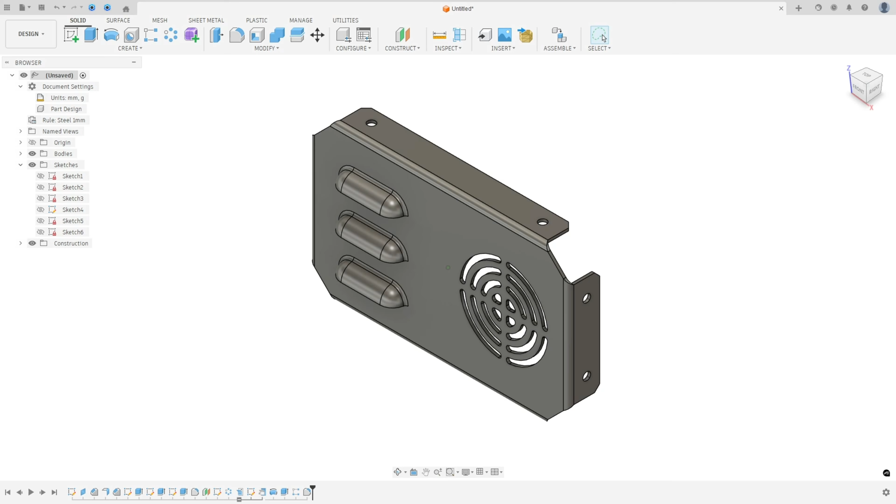Let's create one more tutorial in Autodesk Fusion. In this video, you learn to make this sheet metal ventilation cover. So open Fusion and let's go.

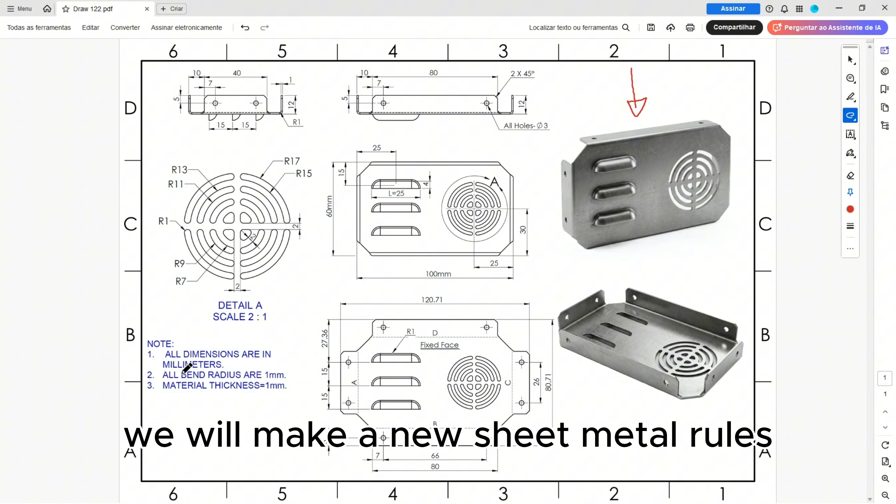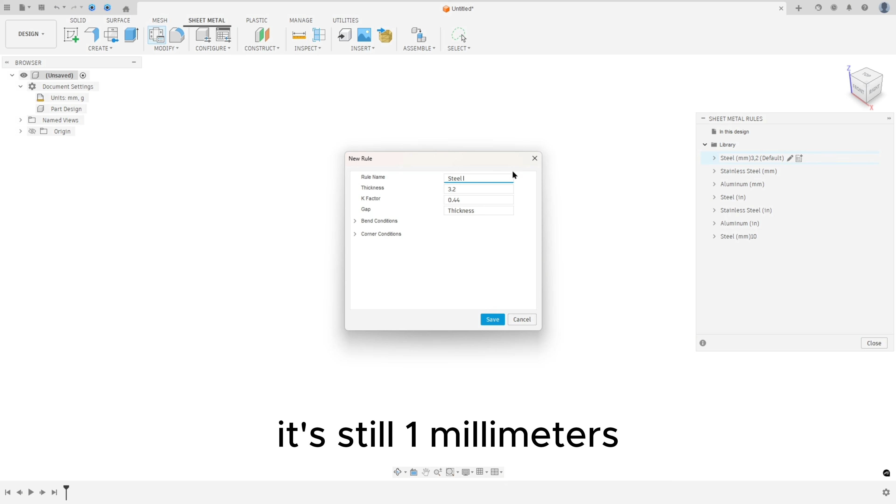The first step to create this part, we will make a new sheet metal rule, with all bend radius 1 millimeters and material thickness 1 millimeters. So open Fusion, go to sheet metal, select sheet metal rules, select new rule, name it steel 1 millimeters, thickness 1, show the bend conditions, bend radius 1 millimeters, and save this.

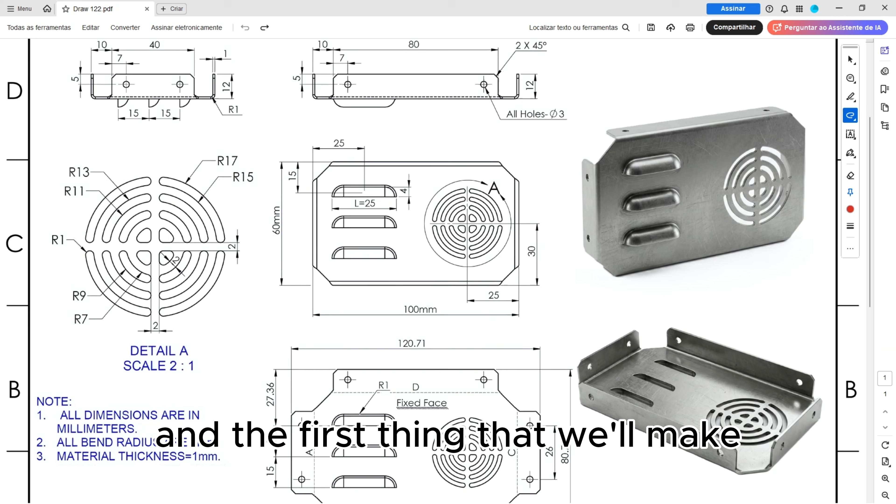We have this new material here. The first thing we'll make is the base, a rectangle 60 millimeters by 100 millimeters.

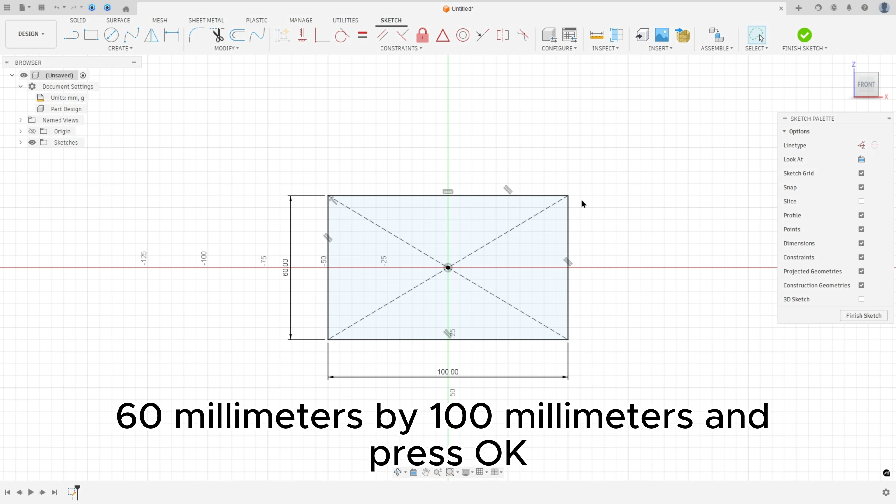Go to create a sketch and select the front plane. Select the 2-point rectangle, center rectangle, click in the midpoint, 60 millimeters by 100 millimeters and press OK. Finish the sketch, go to Flange, select this profile, and the sheet metal rule, select steel 1 millimeters, press OK.

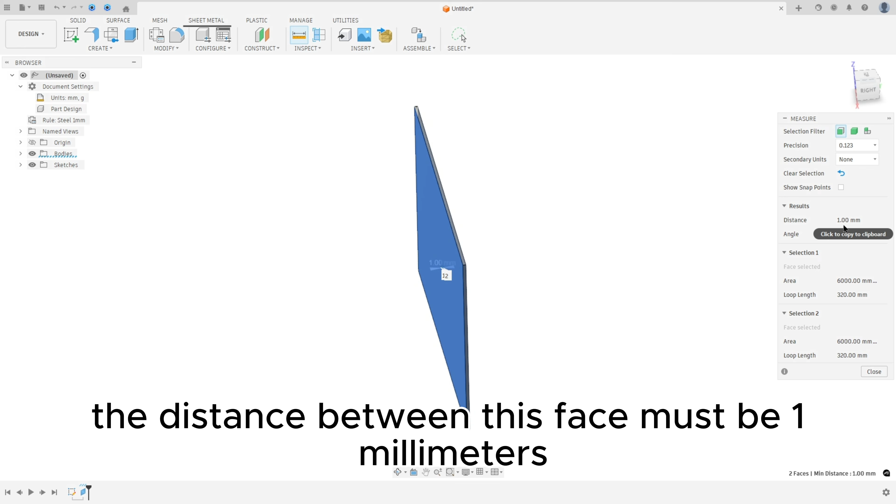Go to measure, select this face and this face. The distance between these faces must be 1 millimeters, the thickness of this material.

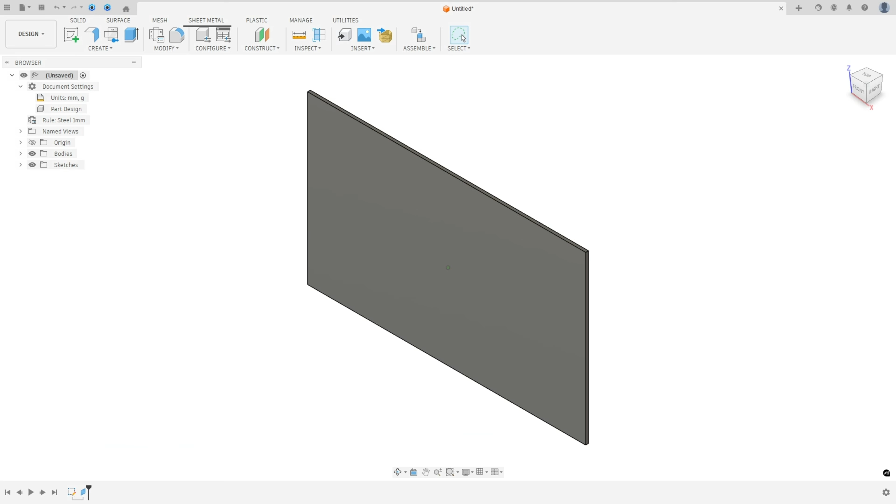Now we will create a chamfer here, 10 by 10 millimeters. Go to modify, select the chamfer, select this edge here and this edge here. The distance here is 10 millimeters, the type equal distance, and press OK.

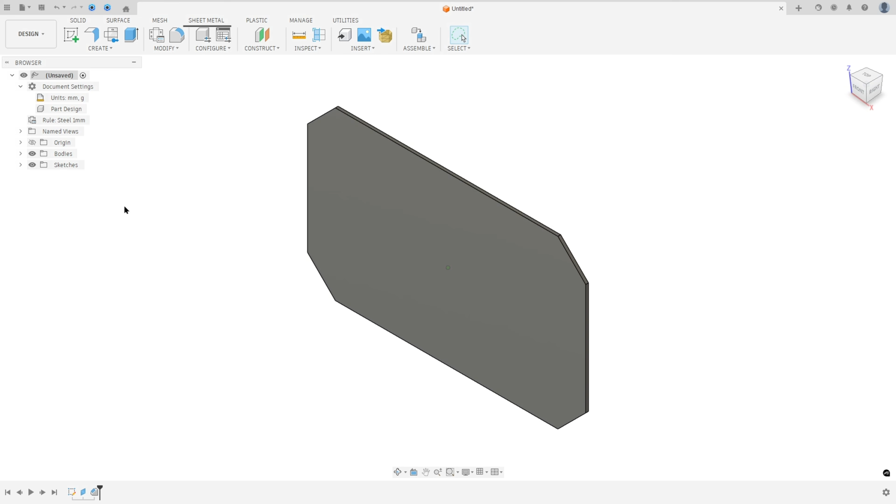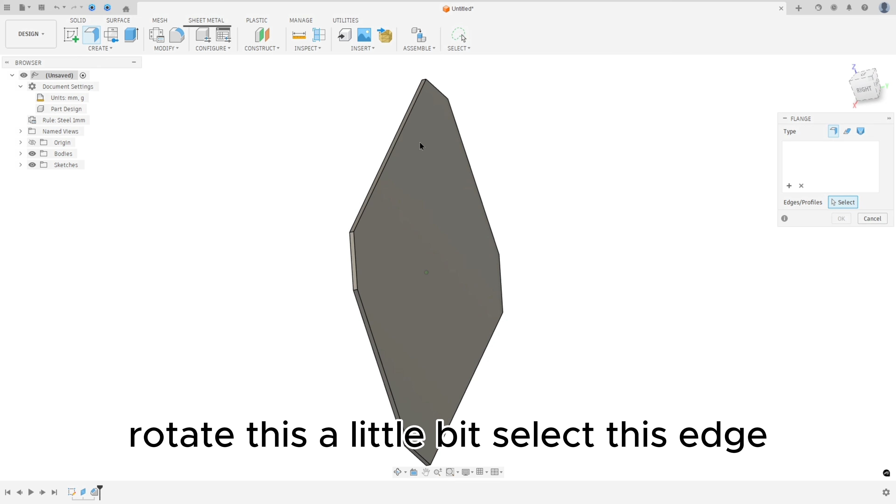Now we will create this flange. The distance of this face and the base is 12 millimeters, so we'll create all 4 flanges with 12 millimeters. Go to flange, rotate this a little bit, select this edge, this edge, and this edge. Move this, the distance here is 12 millimeters, the bend position inside, and press OK.

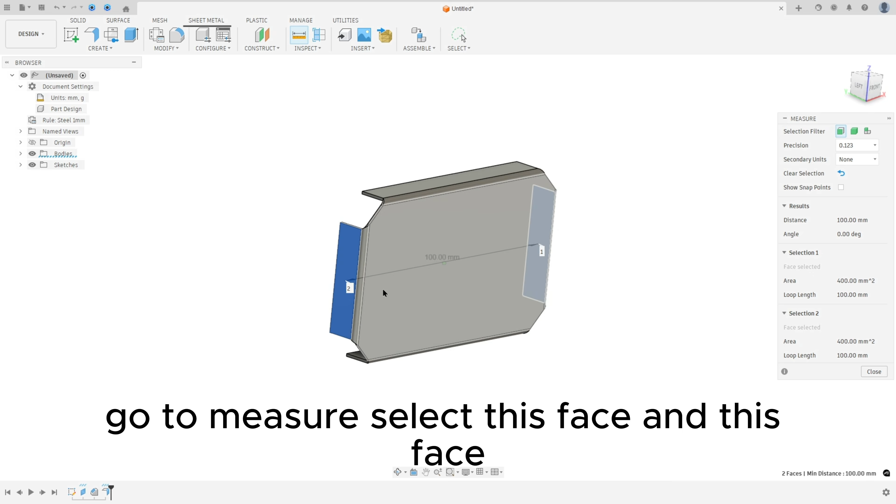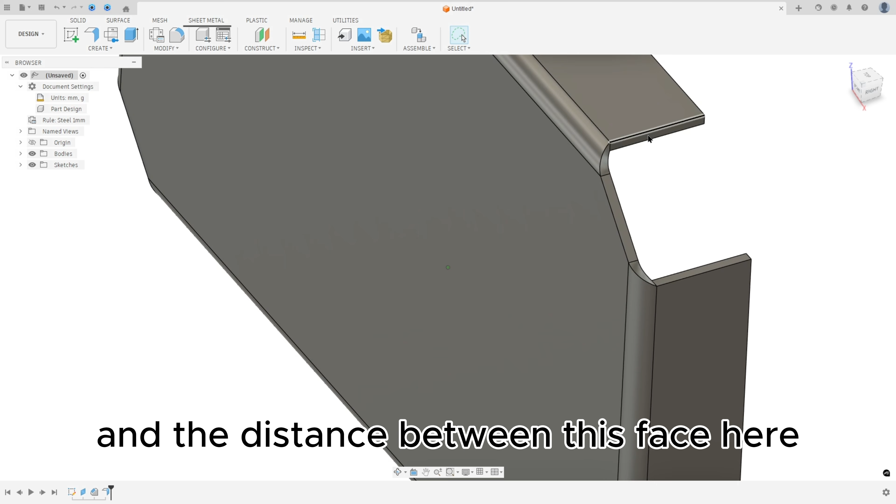Go to measure, select this face and this face. The distance here must be 100 millimeters and the distance here 60 millimeters. The distance between this face and this face here is 12 millimeters, and the distance between this face here and this face must be 10 millimeters. We just check the dimensions.

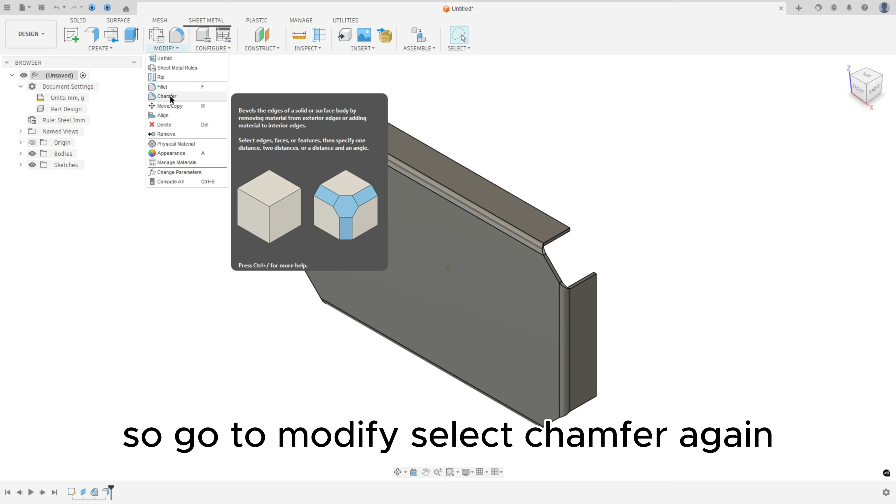Now we will create the chamfer here in this edge. The chamfer is 2 millimeters, equal distance. Go to modify, select the chamfer again, select this edge. The type equal distance, and the distance here is 2 millimeters, and press OK.

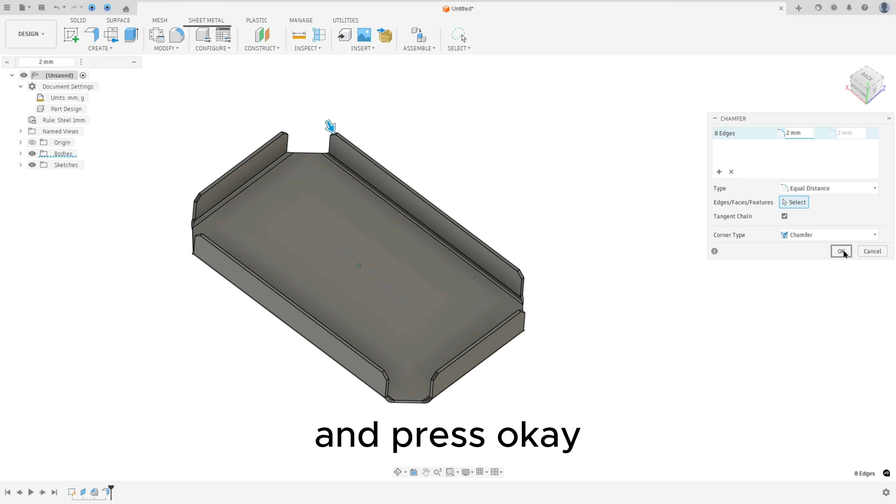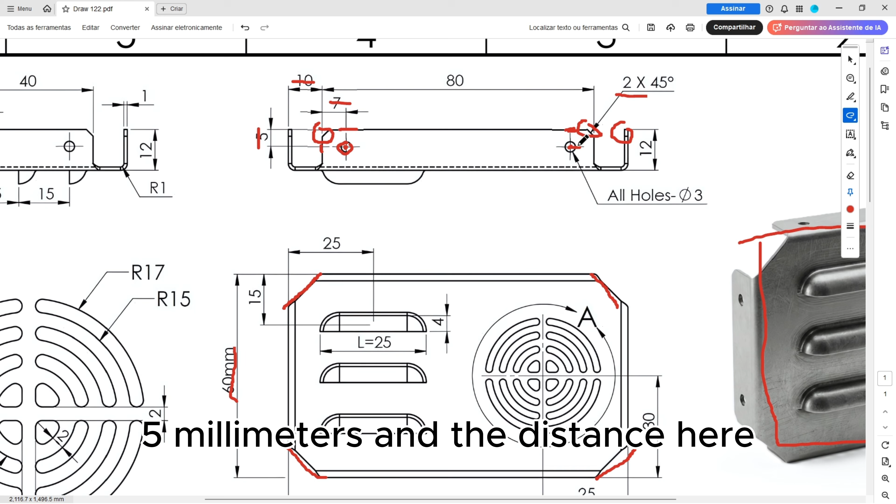Now we will create this hole. All the holes here are 3 millimeters diameter. Let's create this hole. The distance between this hole and this face is 5 millimeters, and the distance between this hole and this face is 7 millimeters. It is symmetric, so in this case the distance here is 5 millimeters and the distance here is 7 millimeters.

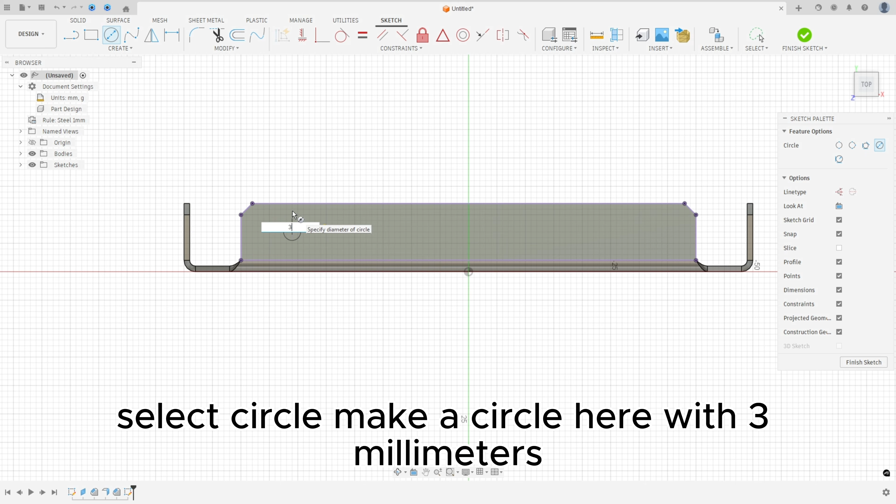Go to create a sketch, select this face, go to create, select project, select this face here and press OK. Select a circle, make a circle here with 3 millimeters, and create another circle here. Go to constraints, horizontal, vertical, select this point and this point here. Select equal, select this circle and this one. Go to sketch dimension.

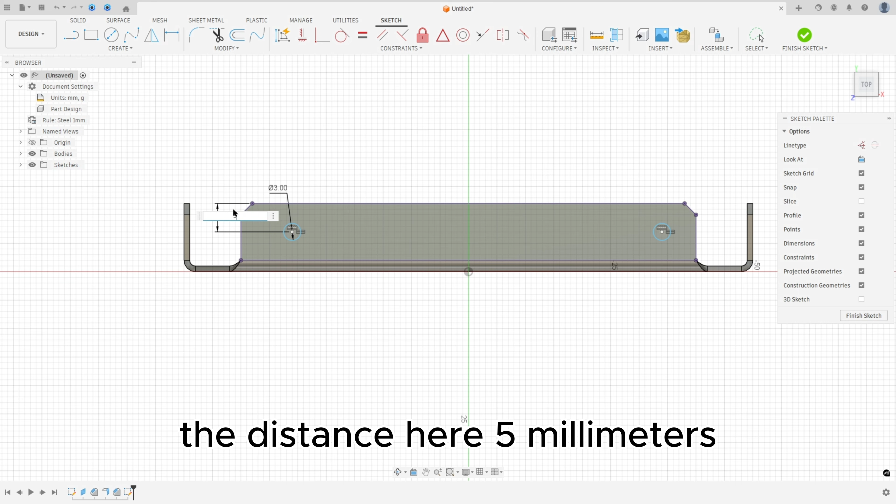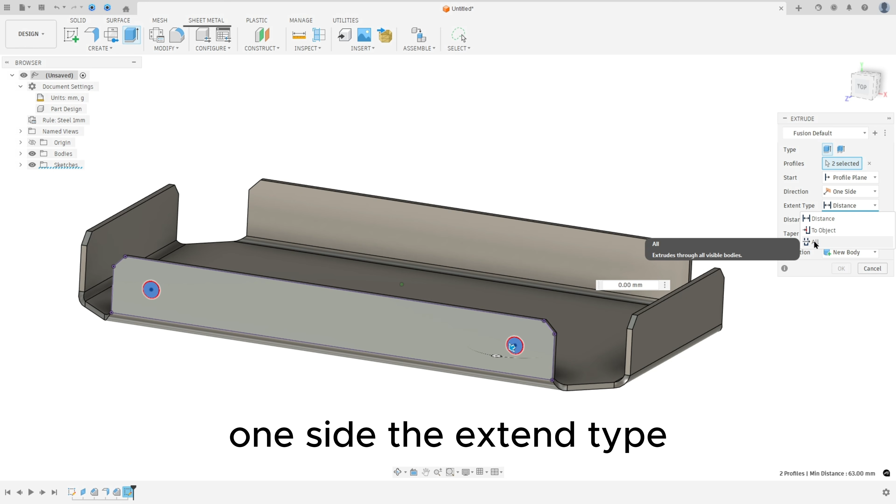The distance here, 5 millimeters, and the distance here, 7 millimeters. Select this circle and this line here, the distance here, 7 millimeters. Finish the sketch and go to extrude. Select these two circles, the direction one side, the extent type select all, flip the direction, operation is cut, press OK.

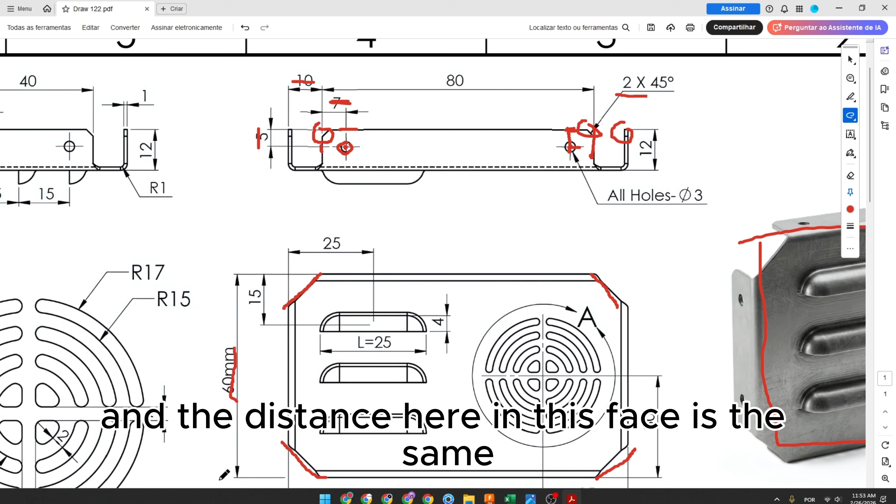Now we'll make the same on this face. Go to create a sketch, select this face here. I will rotate this a little bit. The distance here on this face is the same, 7 by 5 millimeters, and the circles have 3 millimeters diameter. Go to create, select the project, select this face here and press OK.

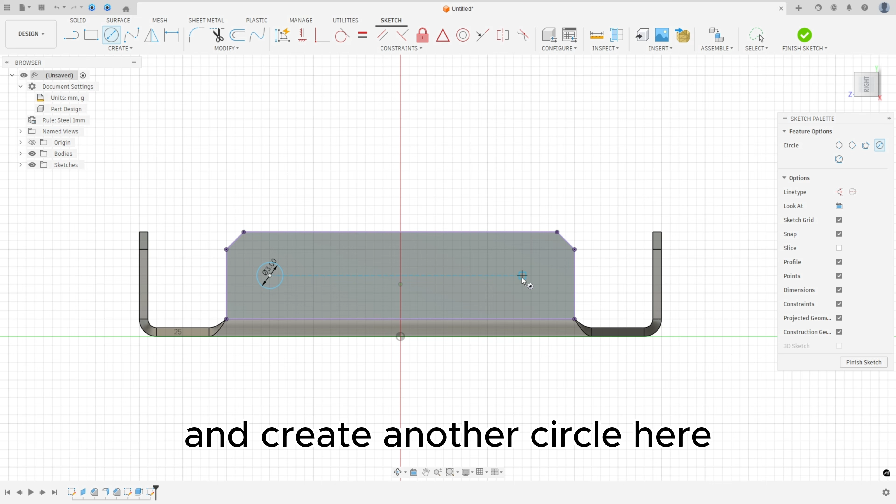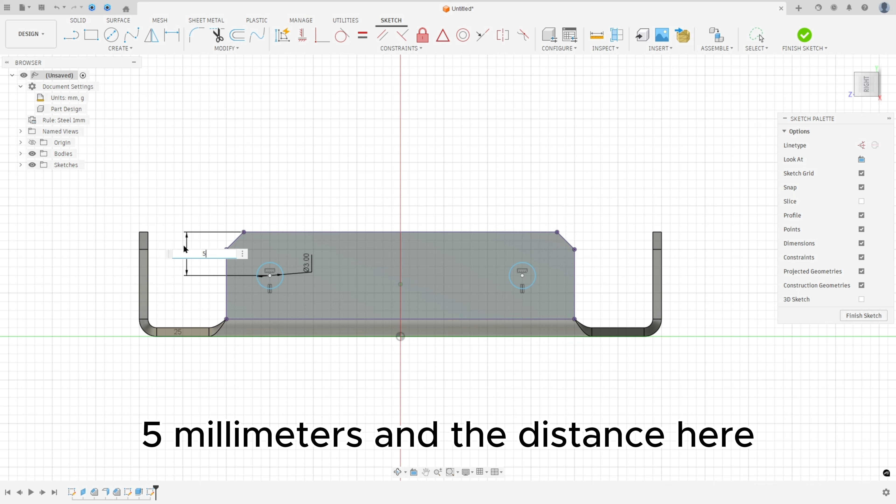Select a circle, make a circle here with 3 millimeters, and create another circle here. Go to constraint, select equal, select this circle and this one. Select horizontal, vertical, select this point and this point here. Now go to dimension. The distance here, 5 millimeters, and the distance here, 7 millimeters. The distance between this circle and this line here, 7 millimeters.

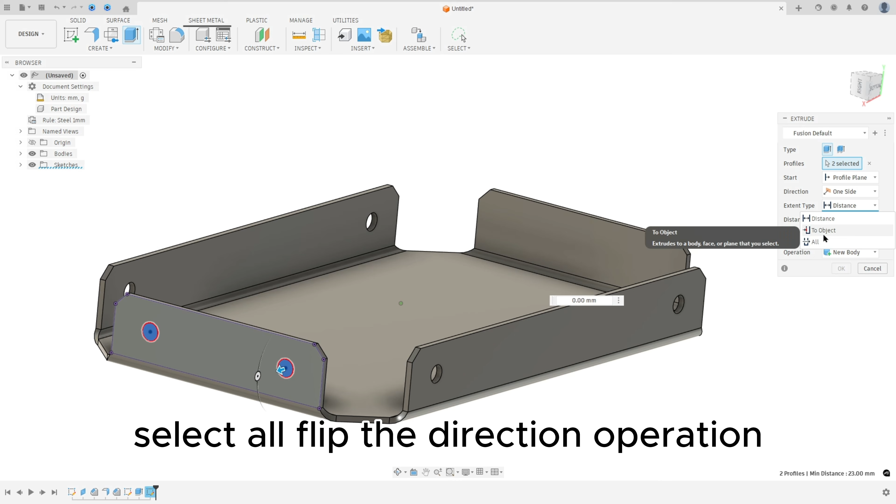Finish the sketch, go to extrude, select these two circles, and the direction one side, the extent type select all, flip the direction, operation cut, press OK. We made this.

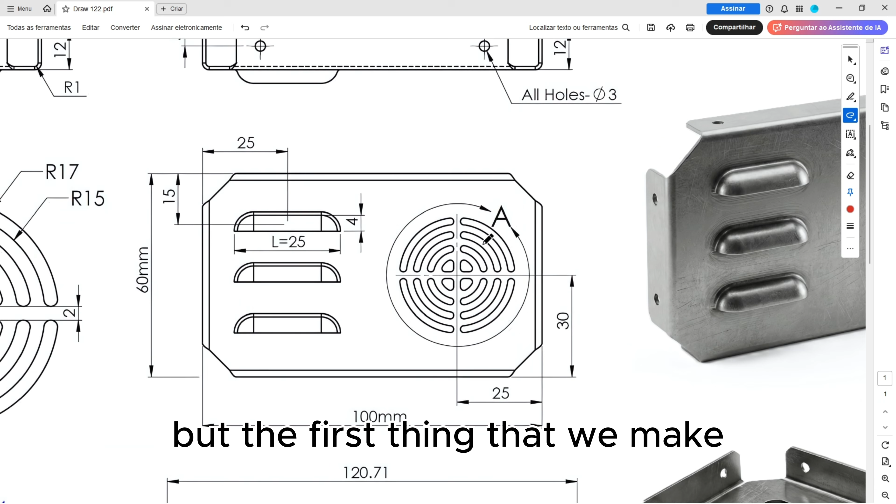And now we will create this vent here. We have the sketch here, but the first thing we make is this point here, the center point, and put this reference dimension, it will be the reference. The distance between this point and this edge is 30 millimeters, and the distance between this point and this edge here is 25 millimeters. So go to create a sketch, select this face, and go to create, select a point.

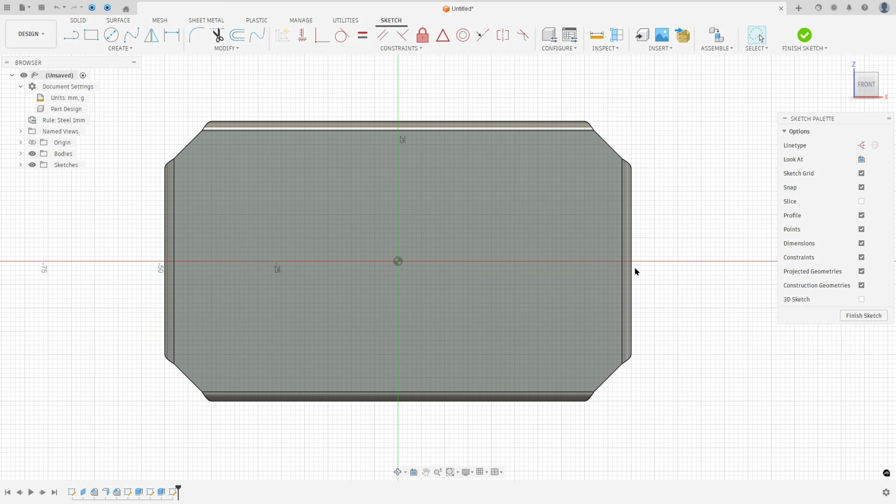Make a point here, and go to sketch dimension. The distance here, 25 millimeters, and the distance between this point and this edge here, 30 millimeters. It is in the center here, okay?

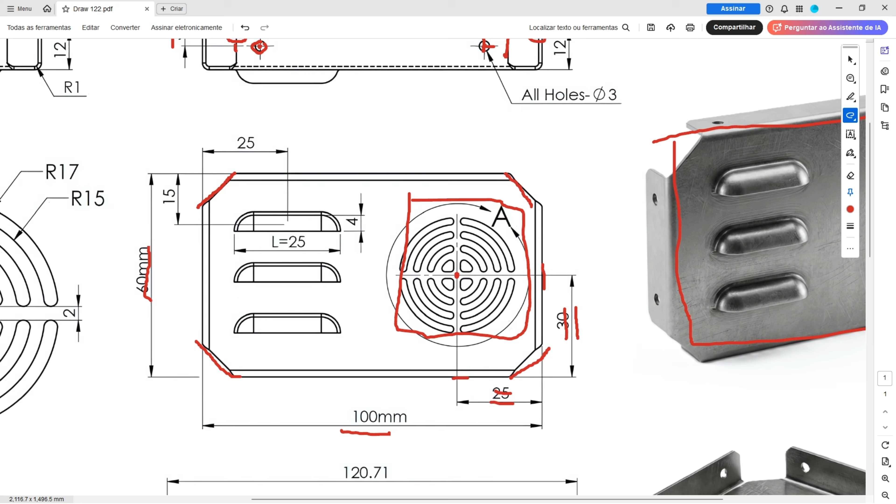And now we will create two lines. Here is the center point. So we will create this line here. The distance between this line and this point is 1 millimeter. And we will create this line here, tangent with this cut, okay? The distance between this line and this point is 1 millimeter.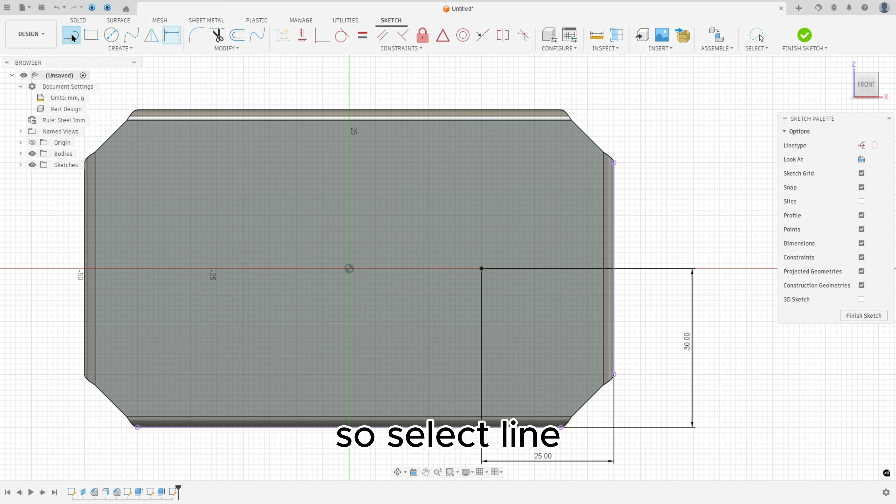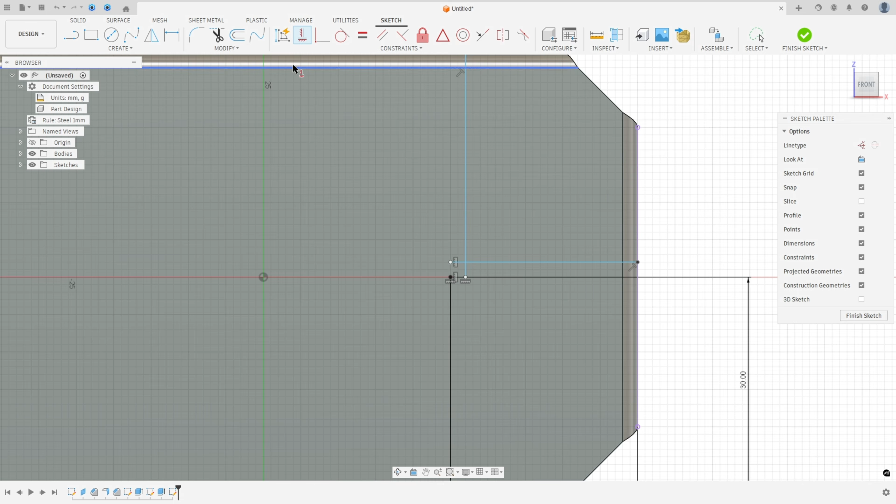So select line, make a line here. It is not a construction line, okay? And make another line here. Go to constraint, select horizontal, vertical, select this point and this point, select this point and this point here. Go to sketch dimension, the distance here, 1 millimeter, and the distance here, 1 millimeter, okay?

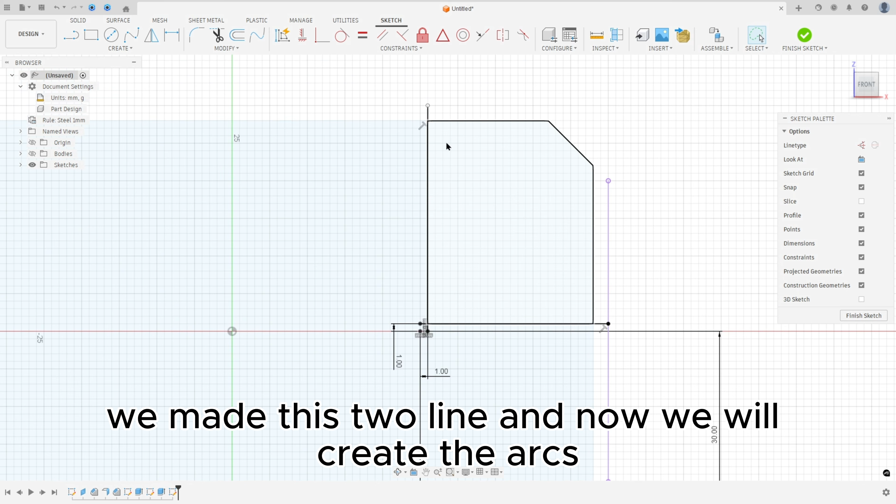I will hide this body a little bit. Let me move this dimension. We made these two lines. And now we will create the arcs, okay?

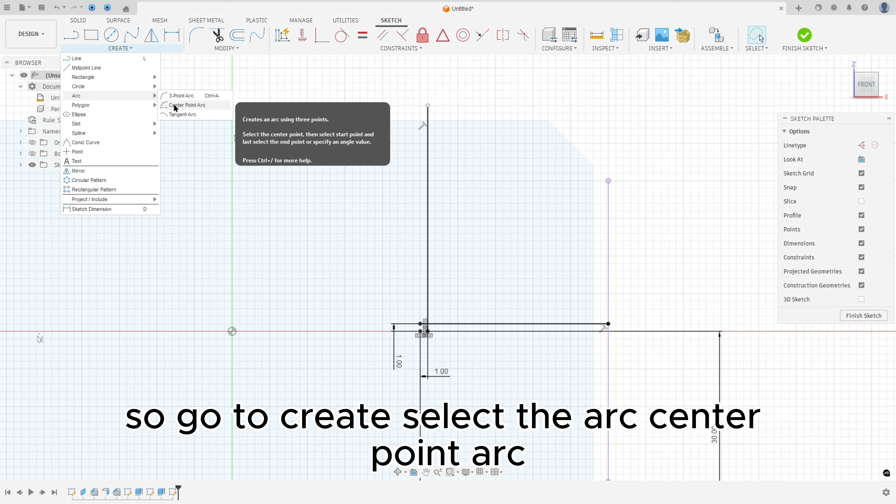The first arc that we make here is 17 millimeters of radius and 15 millimeters of radius. And this arc will be coincident with this line, okay? So go to create, select the arc, center point arc, click here in the center point. And the radius here, 17 millimeters, click here in this line and click in this line, sorry, 17 millimeters.

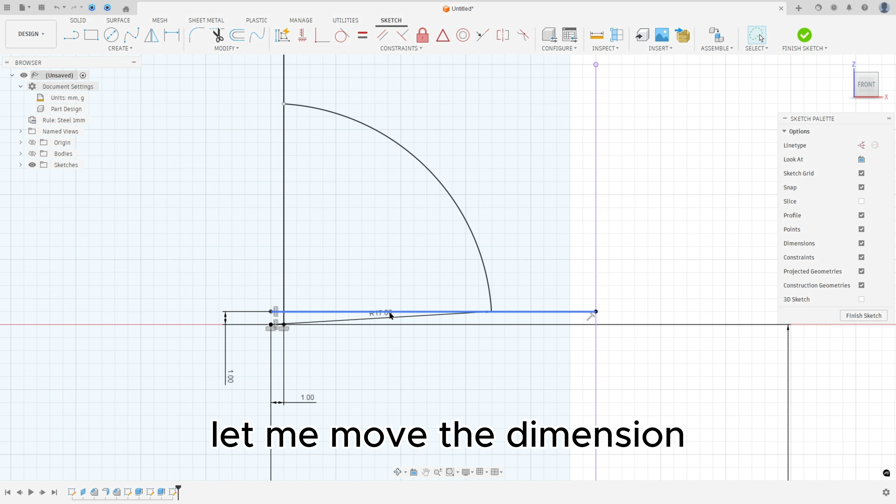Make an arc here. Let me move the dimension and create another arc with 15 millimeters.

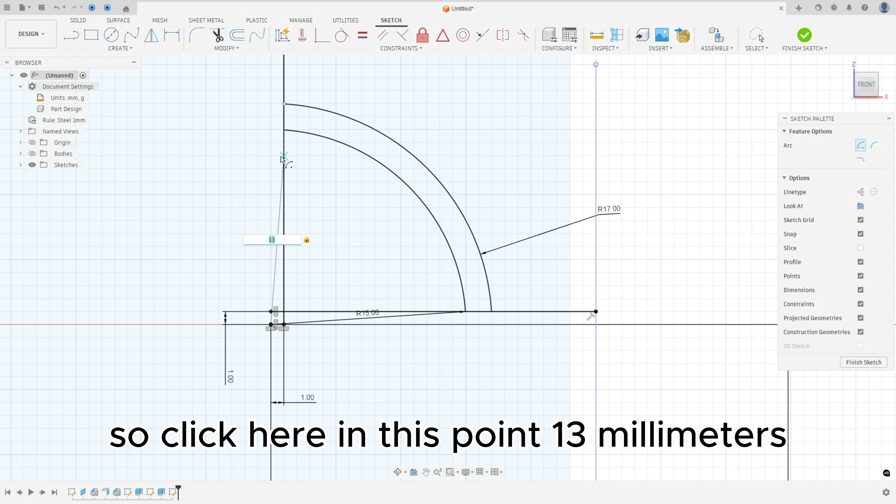Now we will create another two with 13 and 11 millimeters of radius. So click here in this point, 13 millimeters, and 11 millimeters. I will move the dimensions here so it's better for you to see the dimensions, okay?

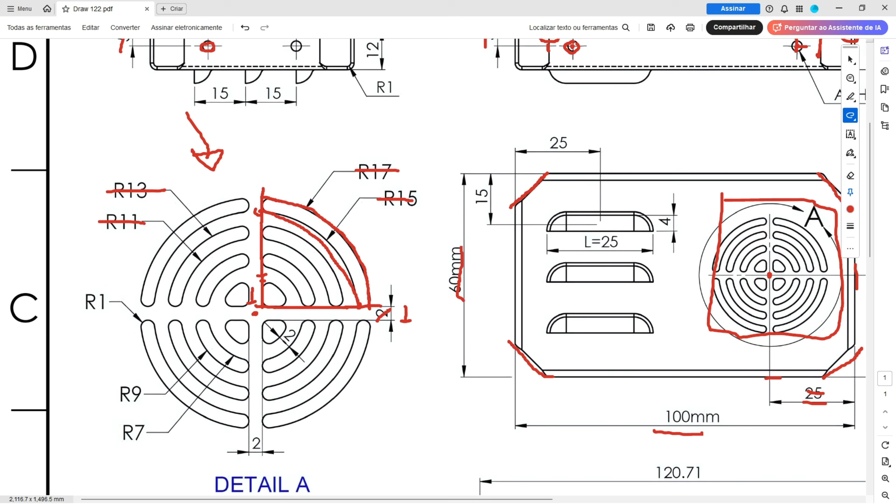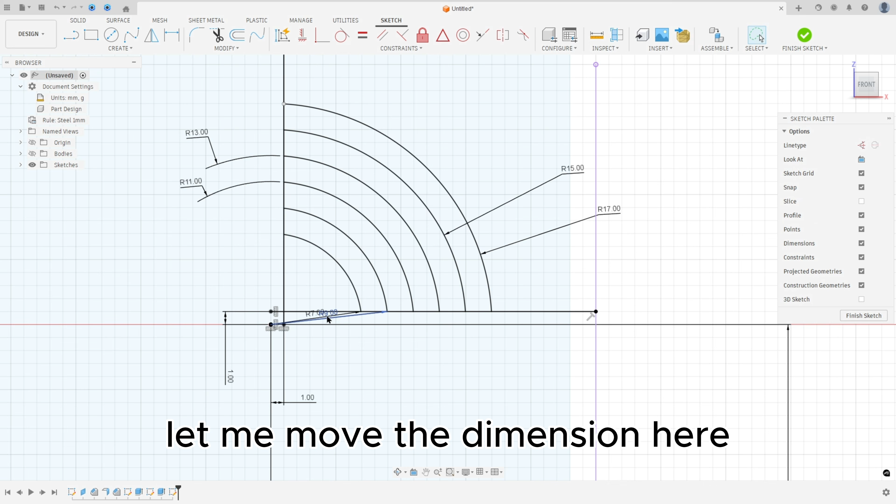Now we will create two more arcs with 9 and 7 millimeters of radius. Let me move the dimension here. And we're missing one. This arc here, the distance between this arc and this one is 2 millimeters.

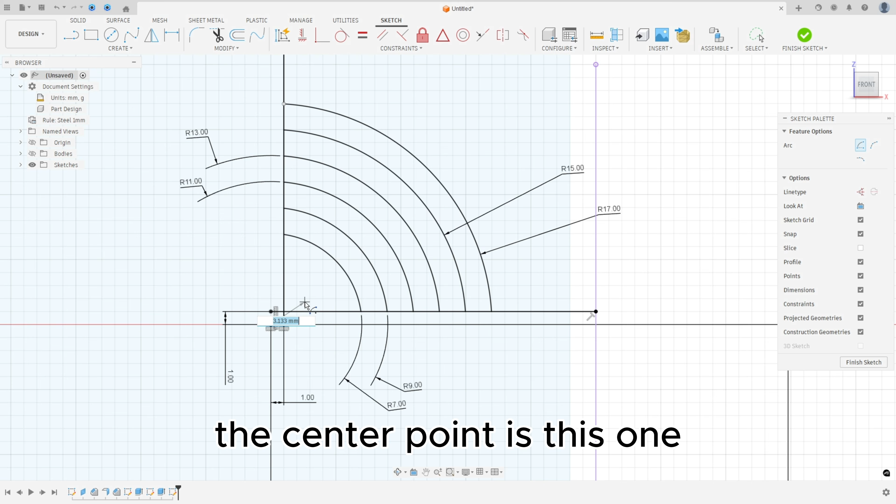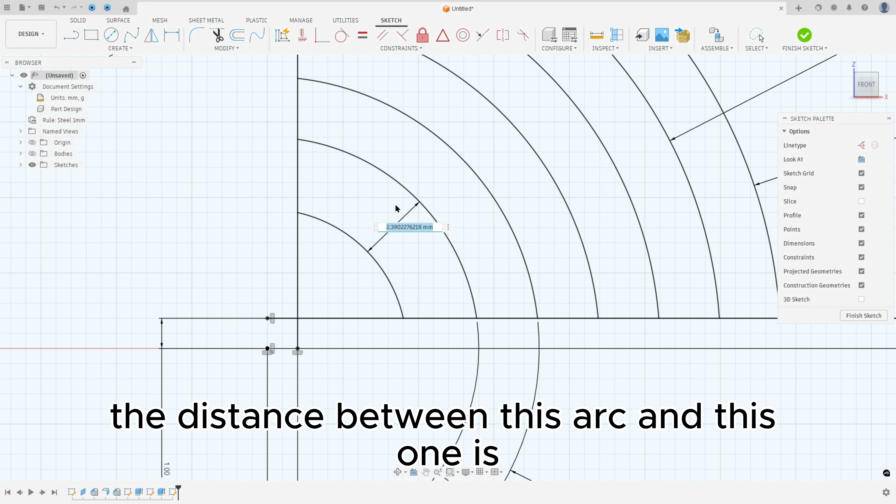So create a new arc here, center point arc. The center point is this one. Make an arc here. Go to sketch dimension. The distance between this arc and this one is 2 millimeters.

So we made this profile. And now let me see if this line is coincident. It must be coincident with this line here, okay? And now finish the sketch.

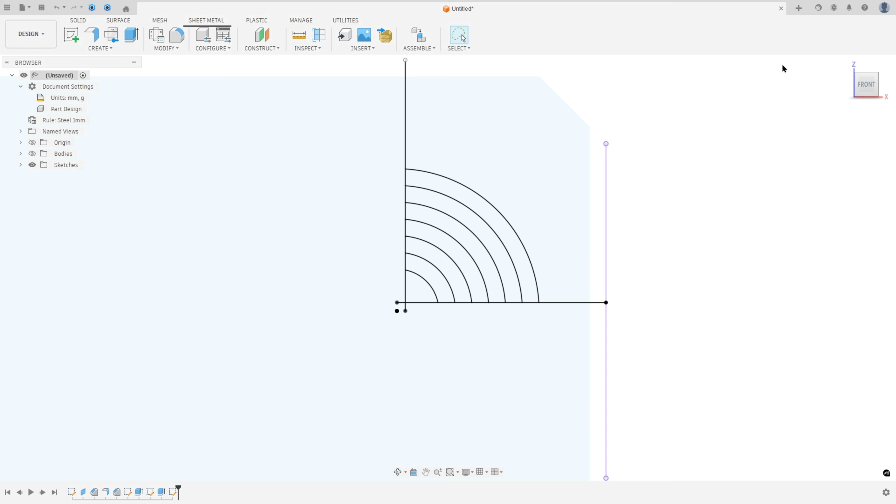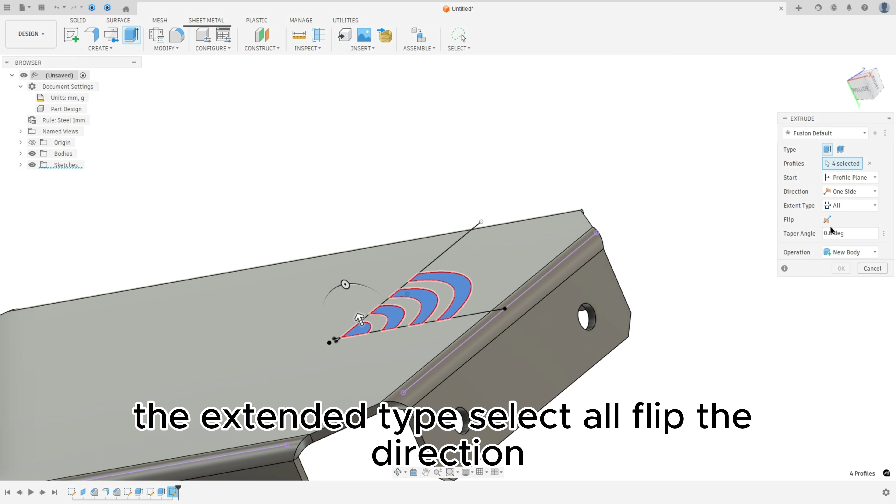We will make a cut here, show the body here. And now go to extrude, select this profile here and this one. The extent type, select all. Flip the direction. The operation here is cut, and press OK. We made this cut here.

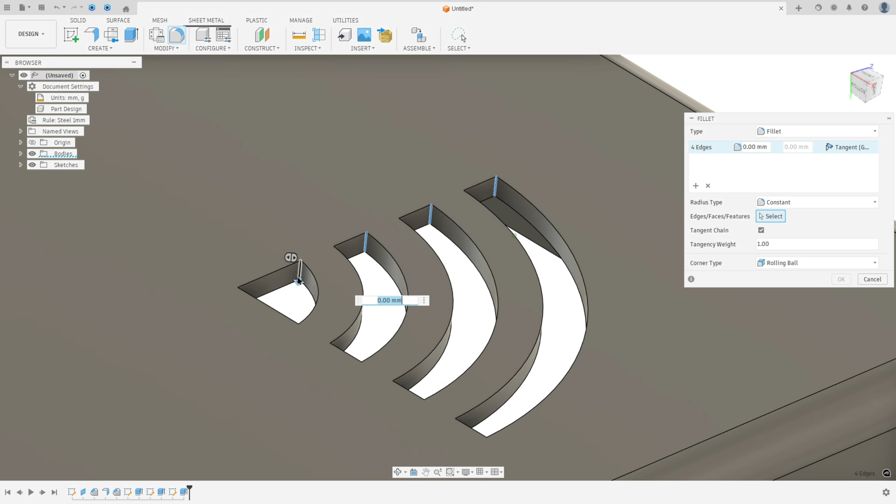And here the fillet is 1 millimeter. So go to fillet and select the inside edge here. The radius here is 1 millimeter. And press OK.

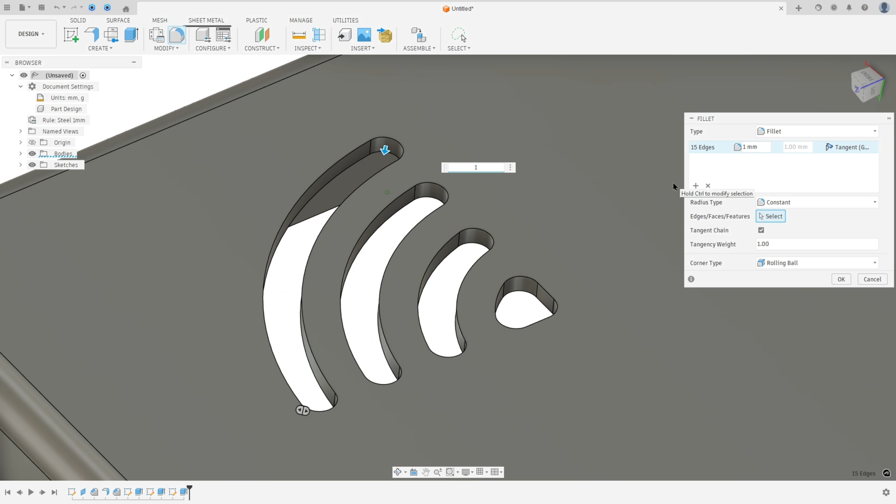We made this, okay? Now we use the circular pattern to create the other 3 cuts here. But first we need to make a reference. So show sketch 4. We need this point here to make a reference, okay?

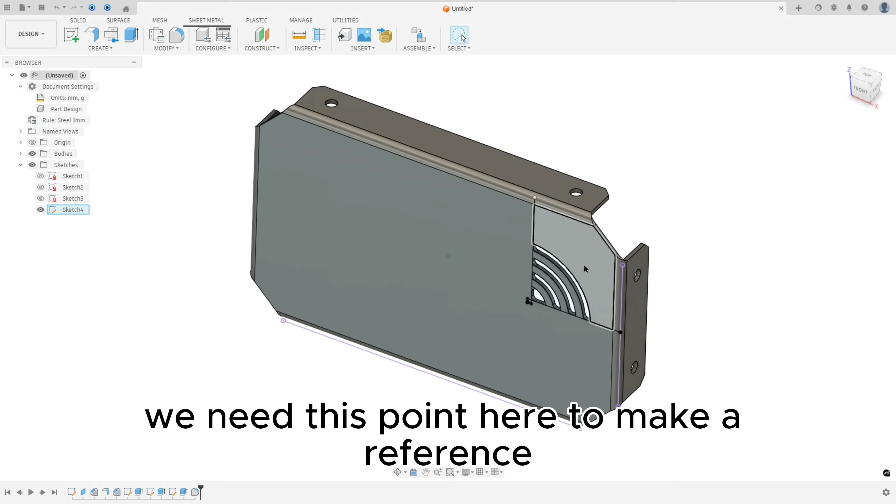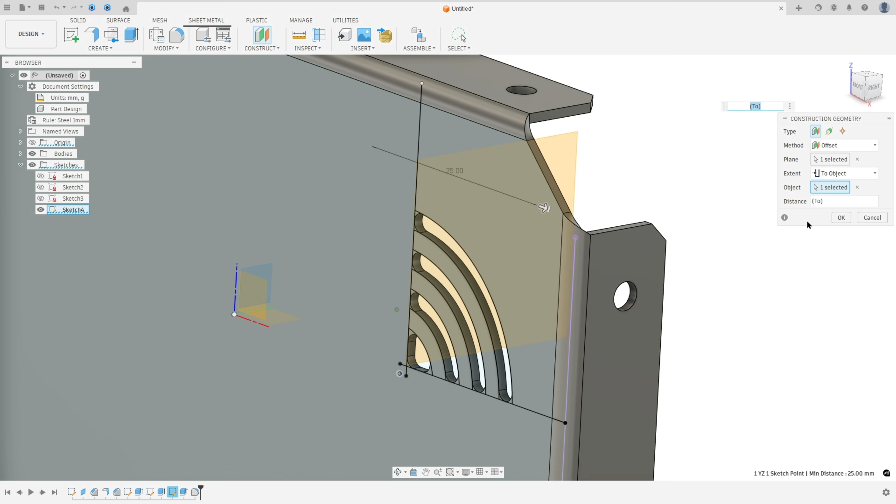So go to construct, select offset plane. And the plane that we'll select is the right plane. And the extent here, select to object. And the object, select this point here, the center of the arc, okay? And go to create a sketch, select this new plane here. And here, select a line, click here in the midpoint and make a line here with 10 millimeters.

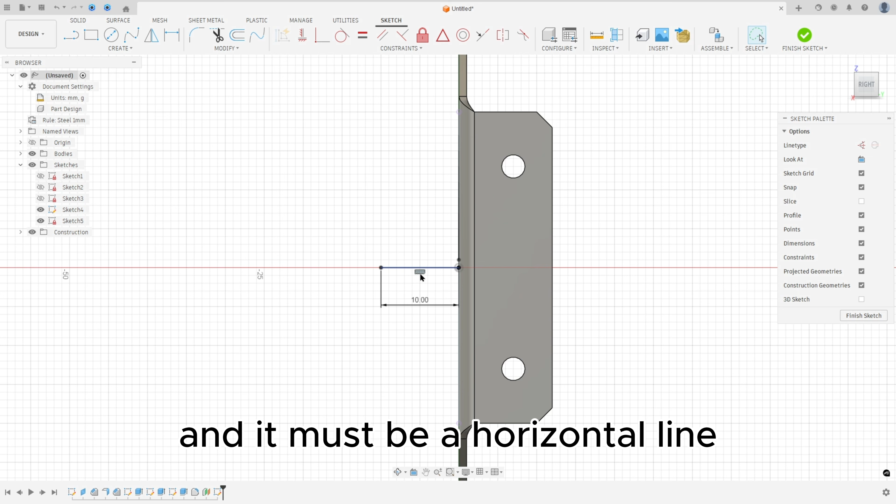Okay, finish the sketch. Make sure that this line is in the center point and it must be a horizontal line or perpendicular to this face, and press OK. Finish the sketch.

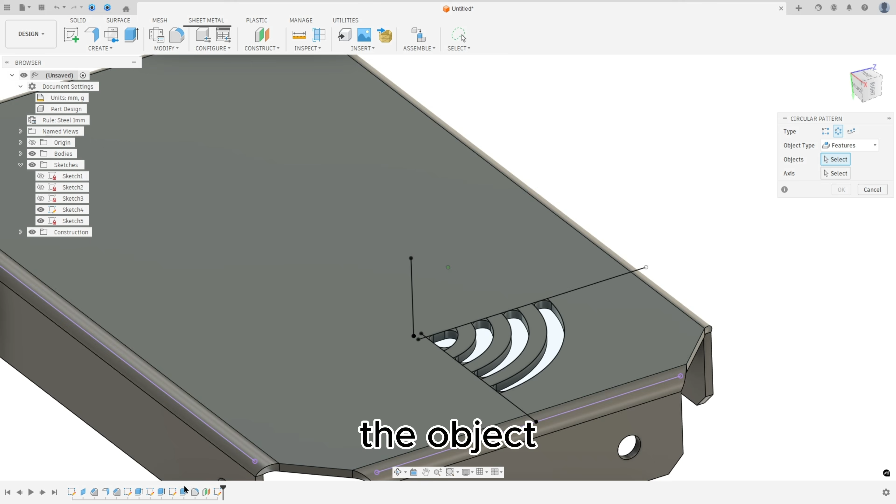Now go to create and select the pattern, circular pattern. The object type, select features. The object, select the extrude and the fillets. And the axis, select this line here. The quantity here is 4 and press OK.

Hide the sketch 4 and the sketch 5. We made this, okay.

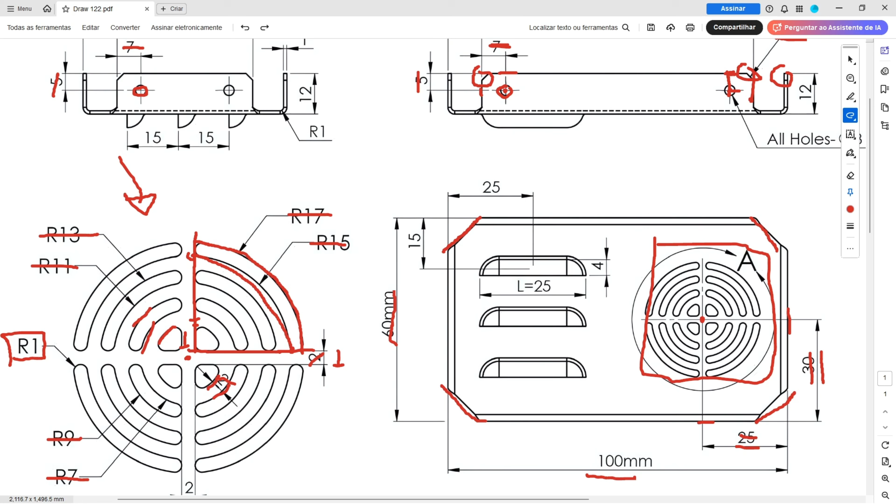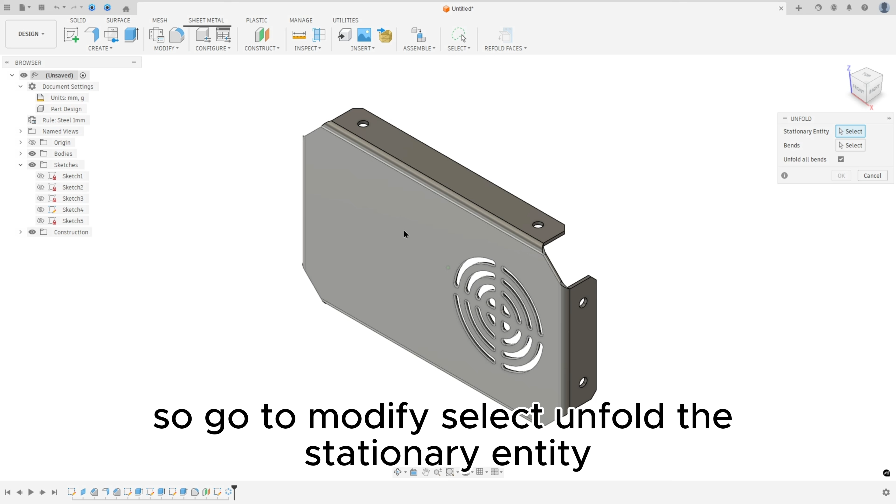And now we'll make these louvers here. But first, we will need to unfold this part to take a reference here. We need this dimension, okay? So go to modify, select unfold, the stationary entity, select this face, and select unfold all bends and press OK.

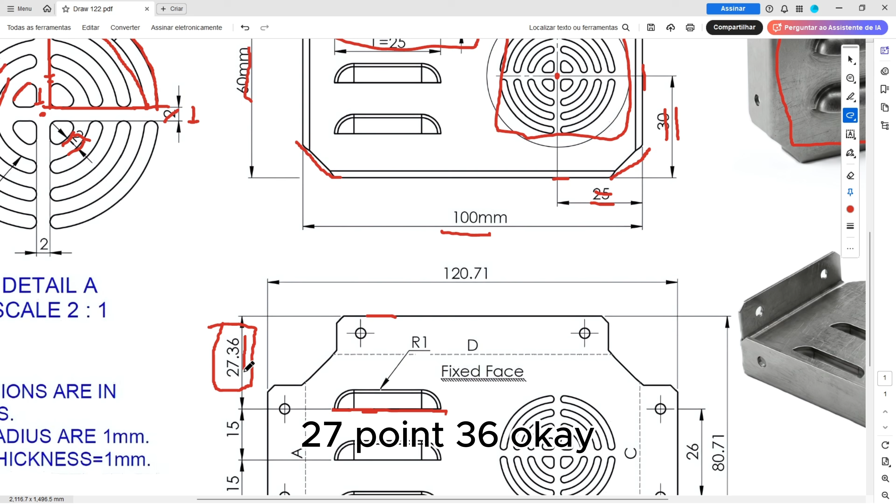And go to create a sketch and select this face here. And now we will create this line here. The distance between this line and this edge here, 27.36, okay? So select line, make a line here, go to sketch dimension.

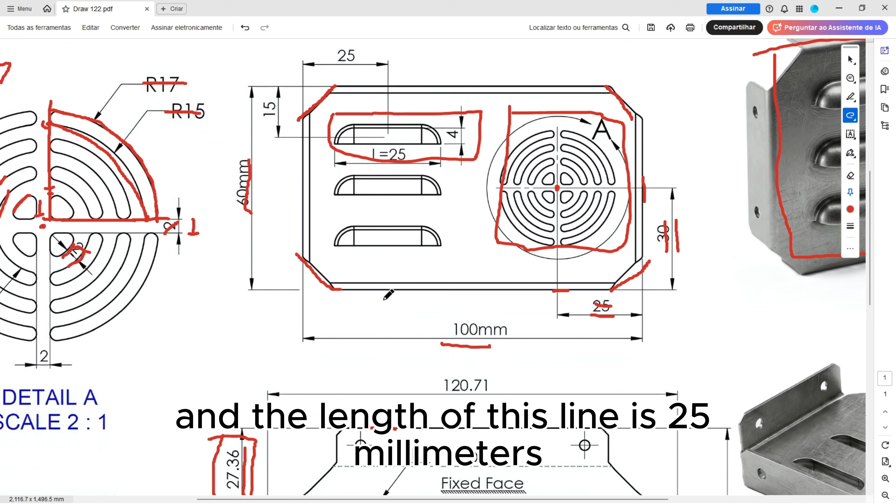The distance between this edge and this line here is 27.36 millimeters, okay? And the length of this line is 25 millimeters. And the distance between the center of this line here and this edge is 25 millimeters, okay?

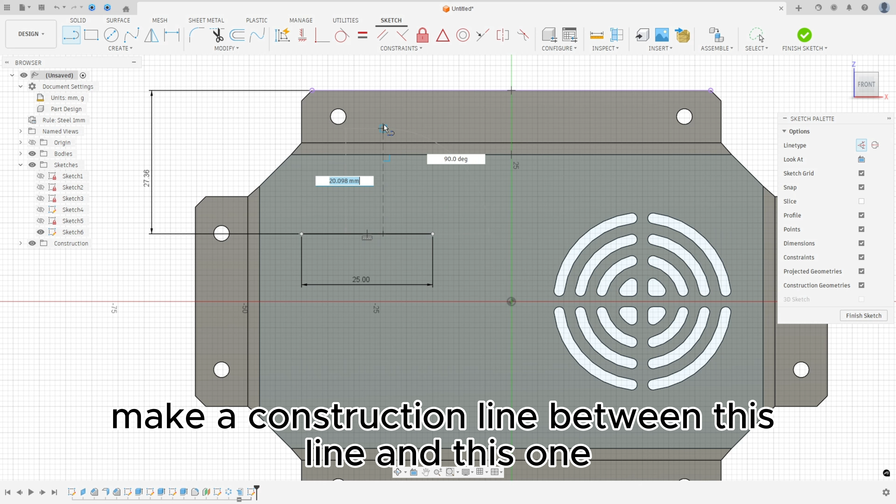So go to dimension, the length here, 25, and select line, a construction line. Make a construction line between this line and this one, and go to constraints, select the midpoint, select this line and this point here, and go to sketch dimension.

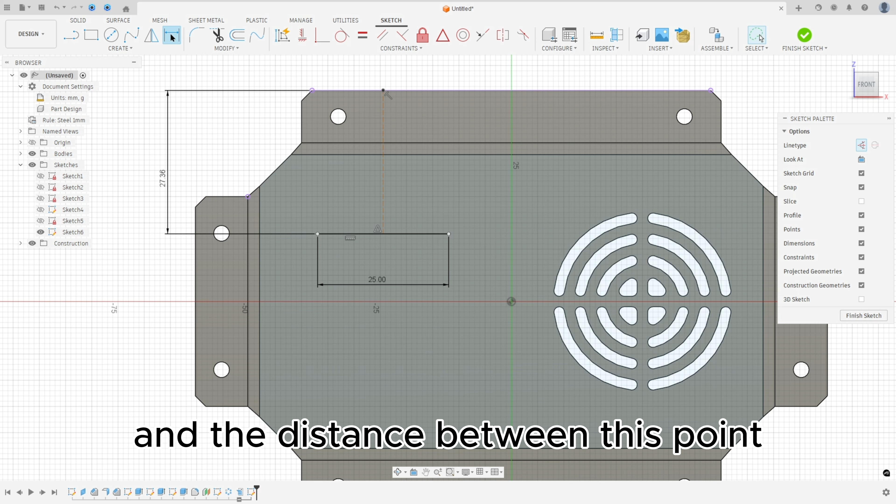The distance between this line here, and we will take a reference here, press letter P in the keyboard, select this point and press OK. And the distance between this point and this line here is 25 millimeters. Or you can take reference from this edge or this face, no problem, okay?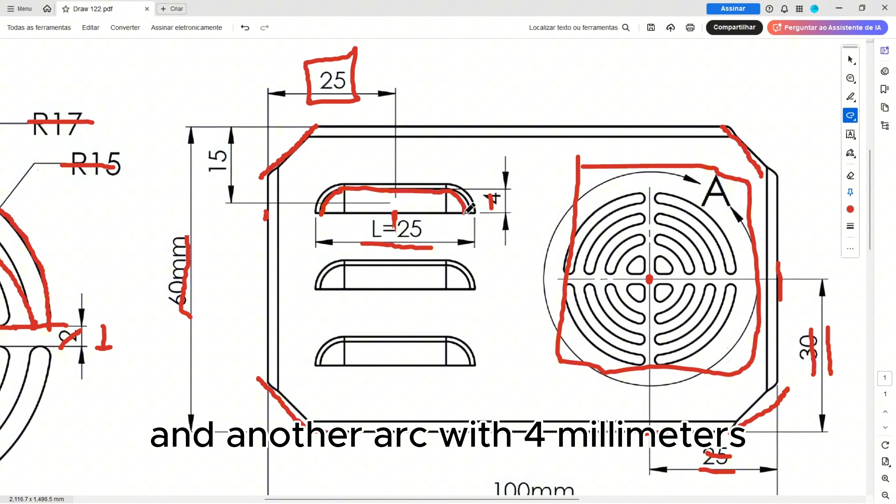And now we will create this sketch. We have an arc here with 4 millimeters and another line here and another arc with 4 millimeters. So select line, make a line here, remove the construction line type, and go to create, select the arc, 3-point arc, click here in this point and this line here, make an arc here, and make another arc here.

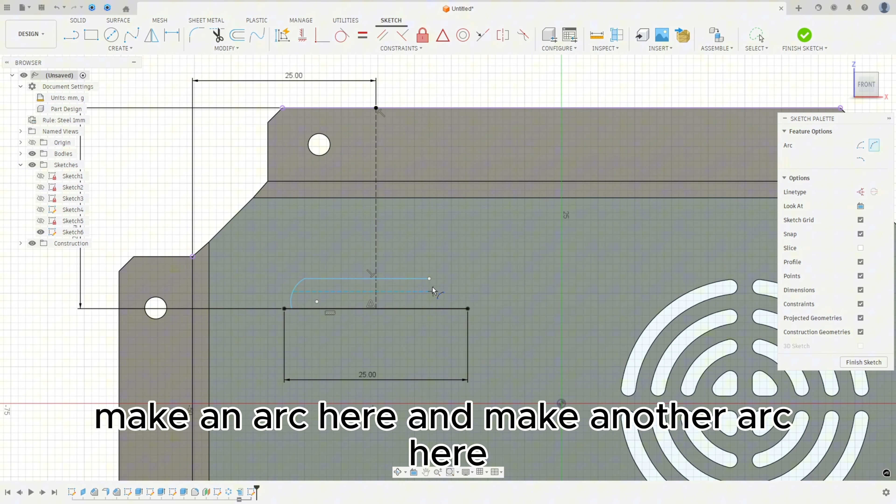Go to constraints, select tangent, select this arc and this line, this arc and this line, and go to horizontal vertical, select the center of this arc and this point here, the center of this arc and this point here. You can move this a little bit here, okay?

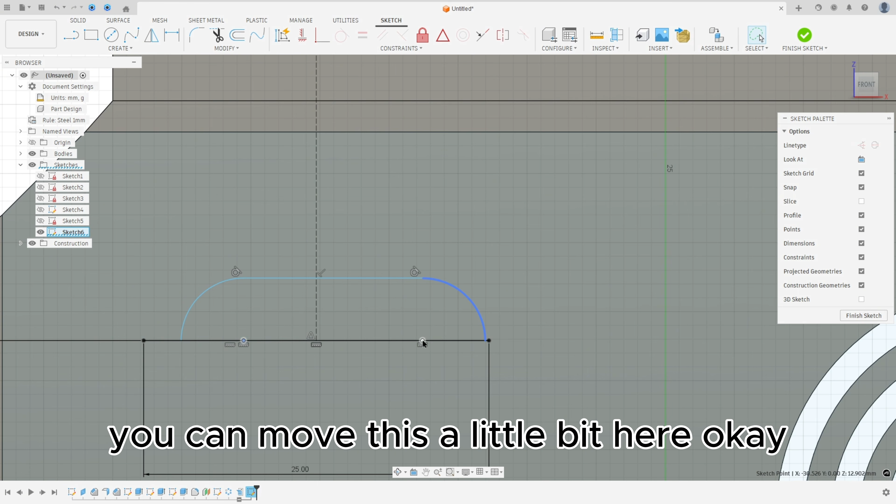And we know that the thickness of this material is 1 millimeter, so we will create an offset here. So go to offset, select this sketch here, the distance 1 millimeters and press OK.

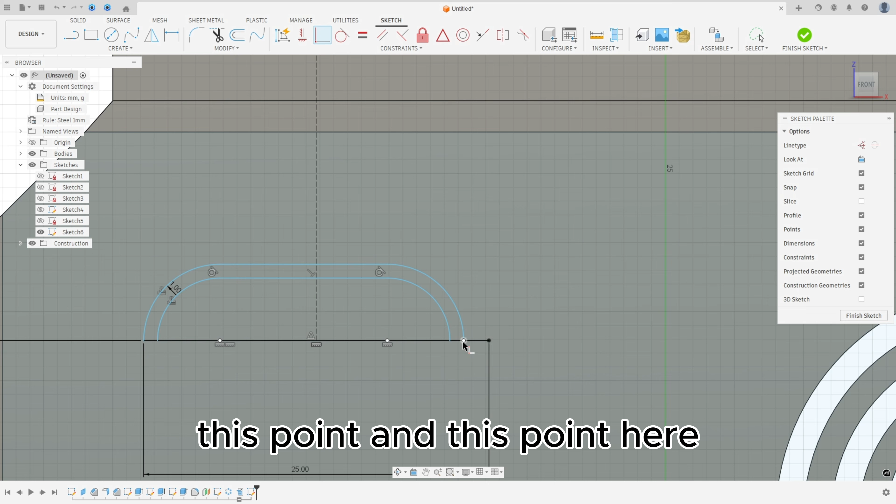And go to constraints, select the coincident, select this point and this point here, this point and this point here. And go to sketch dimension. The inside fillet here is 4 millimeters of radius. And that's it. We made this profile.

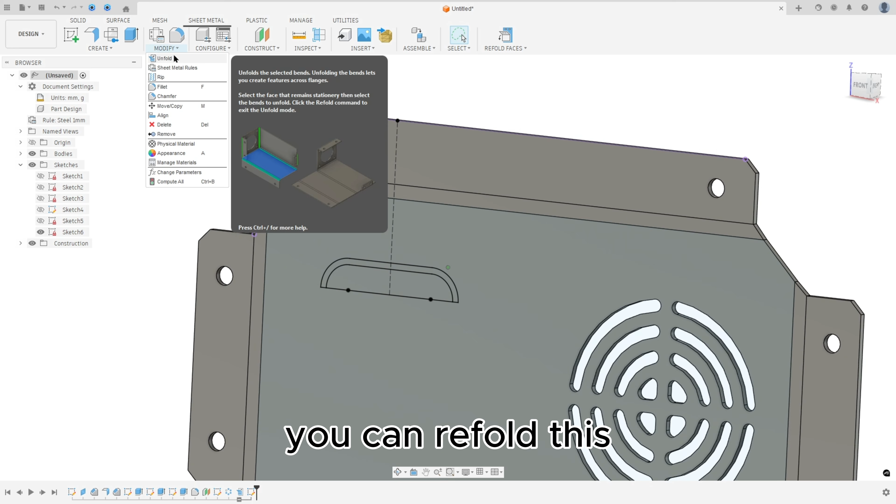Now finish the sketch. You can refold this. So refold face. We made this profile here.

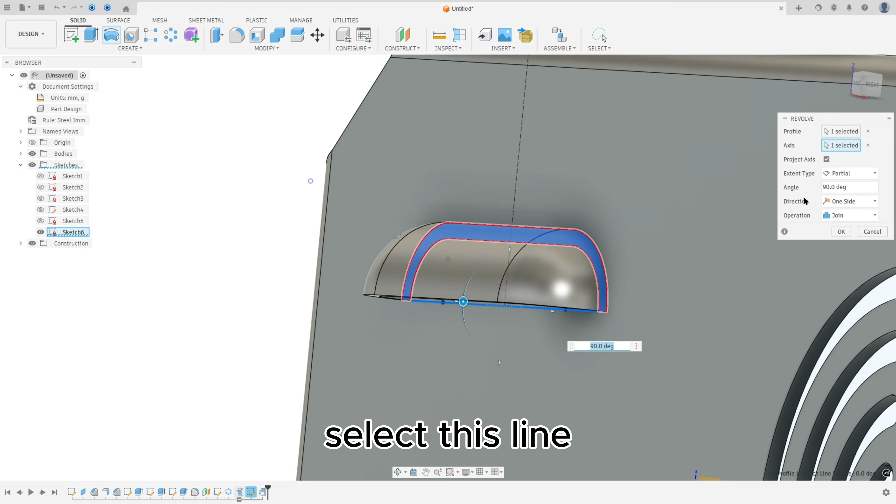Now go to solid and select revolve. Select this profile, the axis, select this line, the extend type partial, the angle 90 degrees, operation join, and press OK.

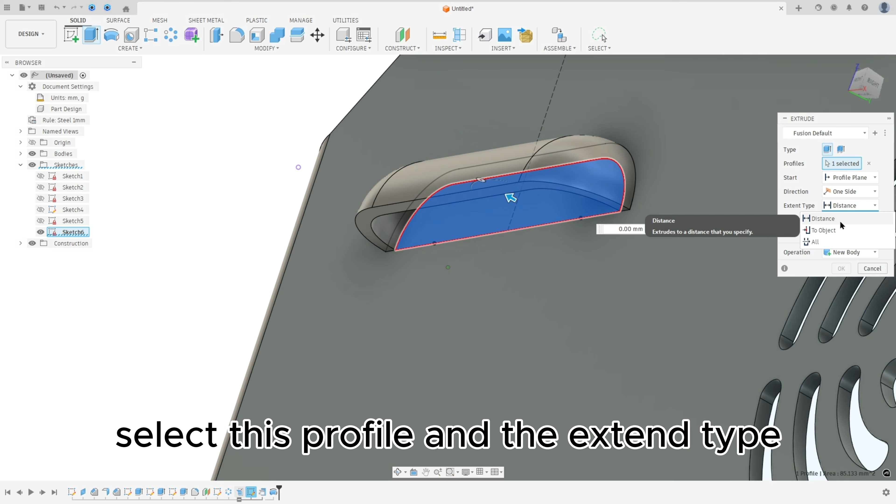We made this, okay? Show the sketch 6 again and go to extrude, select this profile and the extend type, select all, flip the direction, make a cut here and press OK. Hide the sketch 6. We made this cut here.

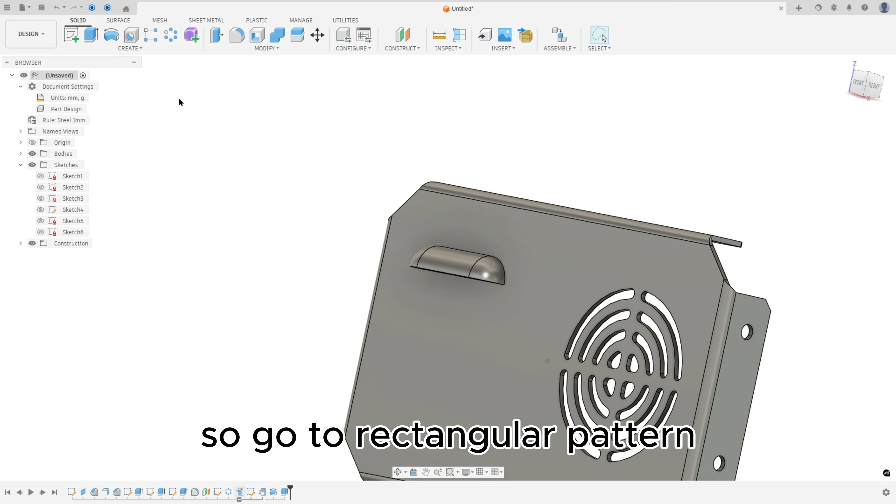Now we need to create more 2 louvers, and the distance between this is 15 millimeters. So go to rectangular pattern, the object type, select the features. The object, select the revolve and the extrude. The axis, select this axis here, move this a little bit.

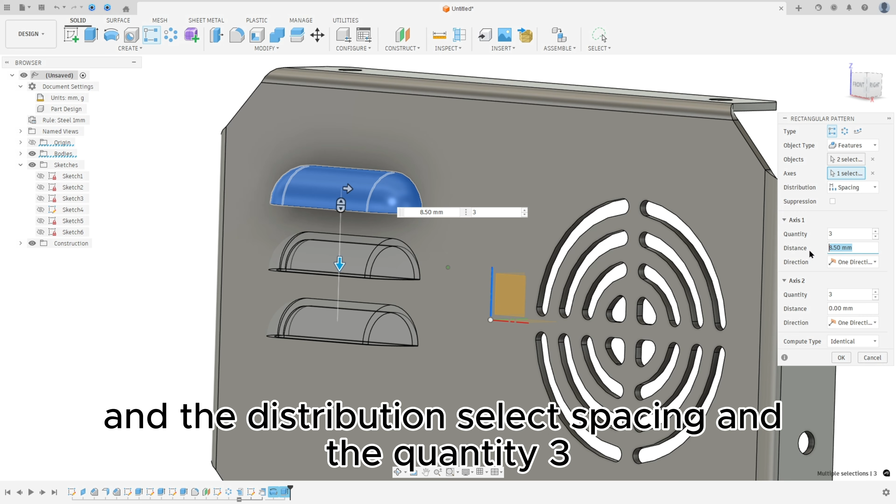And the distribution, select spacing. And the quantity, 3, the distance, 15 millimeters. And press OK. We made this, okay?

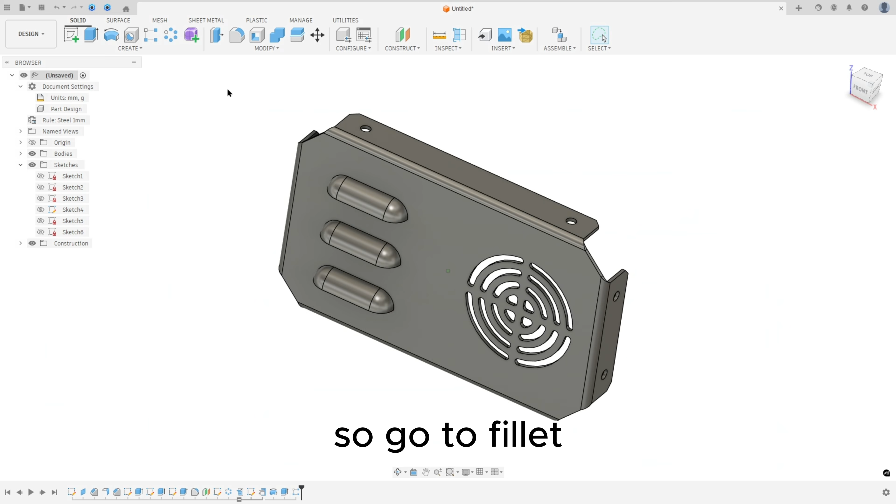And now to finish this, we have this fillet here with 1 millimeters of radius. So go to fillet, select this edge here, 1 millimeters of radius, and press OK.